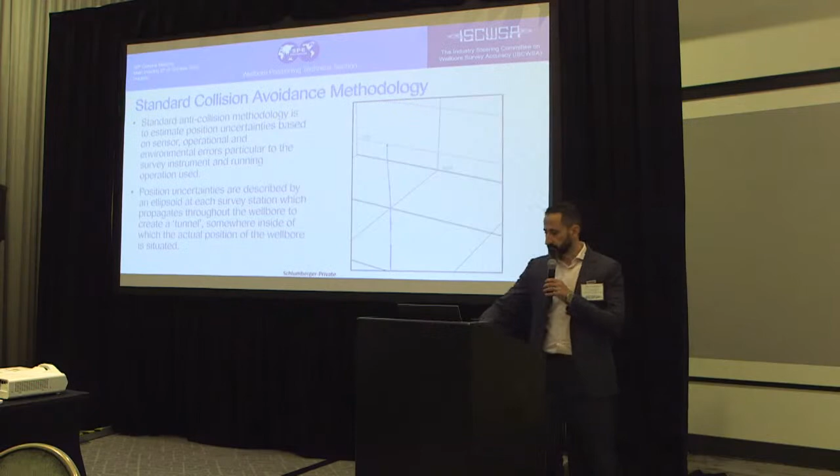So the standard way today to avoid collision, you guys are all experts in this. The way that we avoid collision today, we take the survey first, usually, and calculate the ellipse of uncertainty based on the tool that we run and the environment it runs in. We have the ellipse size, and we do the same for the offset well as well. So we have two ellipses.

Based on these two ellipses, we calculate the separation factor, which is the ratio between the center-to-center distance between the two wells divided by the combined uncertainty between the two wells. This is the conventional way, this is how everybody's doing it. It's very safe - typically there isn't a single collision occurring due to using this. So there's no issue with this one.

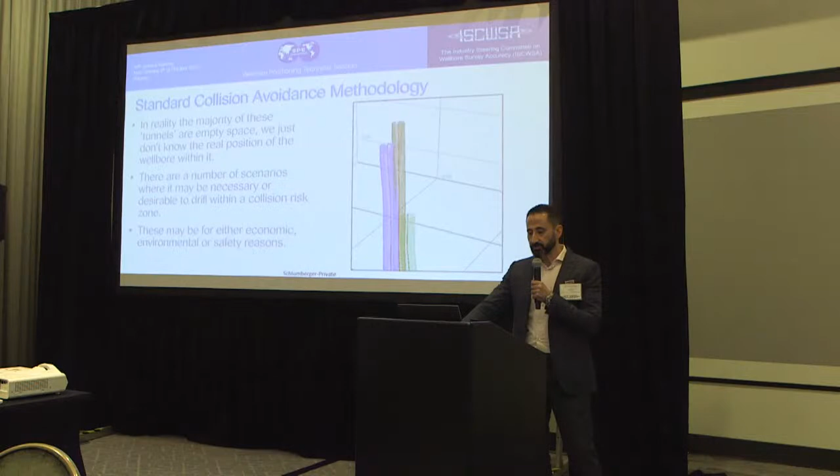So in reality, the size of the ellipse that we have, the well can be anywhere within it - it could be on the far left, the far right, or probably in the middle. So we have a lot of region, a lot of part of the reservoir that is untapped. So in some applications, we might need to go and drill in this region of high risk of collision.

Several reasons - one I just explained, like infill drilling. You have your ellipses touching, and now you say I'm not going to drill any closer because of the collision risk. But what about your reservoir production? What about all the other aspects? In some situations, you need to drill closer, and these are some of the examples, some of the applications.

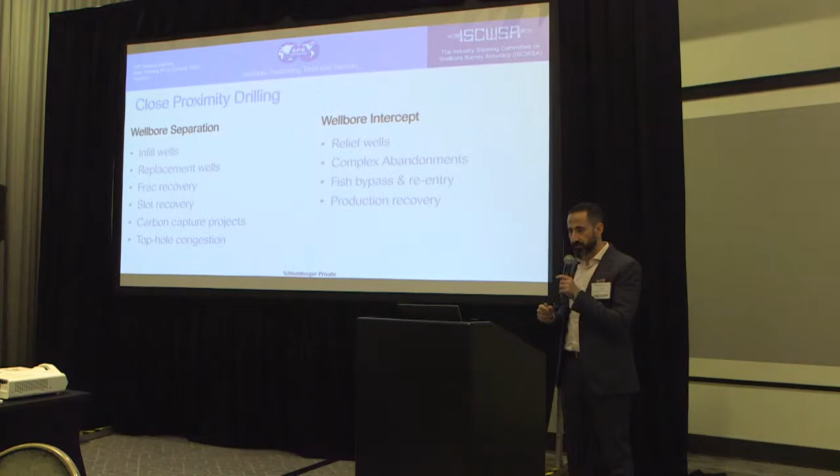Infill wells - you need to drill closer even though you have a collision risk, but you start to think of ways to get closer while monitoring the collision and avoiding colliding with the other well, even though we're using the separation factor. Replacement wells, frac recovery, slot recovery, carbon capture, top sections, top hole congestions. So these are situations where we want to avoid colliding.

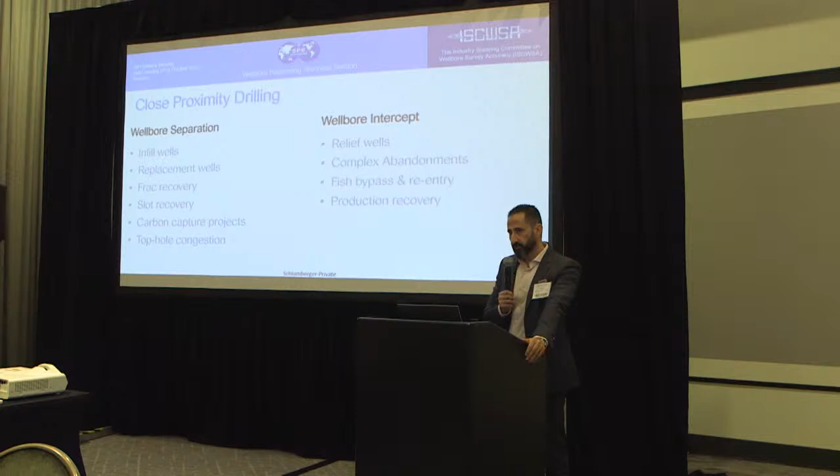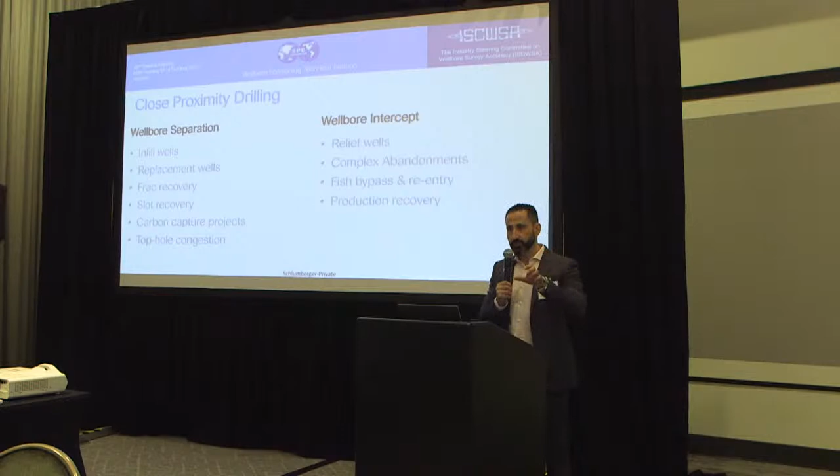Other applications as well, this will be on the other side when we want to intercept for relief well, for example, and like P&A and re-entry. We really want to intercept at a specific interval, at a specific formation, and we really want to avoid a premature interception. So this means we have to get close to the other well, and we have to enter this zone of high risk of collision, even though our objective is to intercept, but not here, later on.

So one way to do it is to monitor how far we are from the other well and range to it. How do we do it?

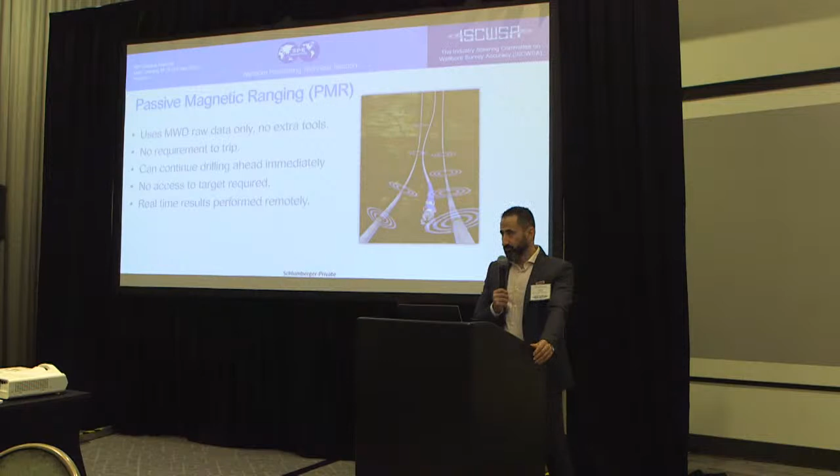Passive magnetic ranging, typically the most common and most economical method used. Vinny touched on it this morning, so I'm not going to spend a lot of time on it. But the takeaway is, it's done using any MWD tool, most MWD tools out there. You collect the measurement, process it, and it gives you - taking a certain number of surveys - an idea of the direction and distance of the offset well, given that it's cased, then you get interference from the cased hole. So passive magnetic ranging has been around for some time. It's nothing new - this is not what we're presenting today.

It falls into two categories, two aspects of passive magnetic ranging. One of them is monitoring, the other one is ranging. What I mean by this: there's one aspect where we take a survey per single, or a survey like by mid-stand, just to check for external interference, just as a detection to tell us if there is interference or not. It doesn't tell us anything more, just gives us an idea if there's interference.

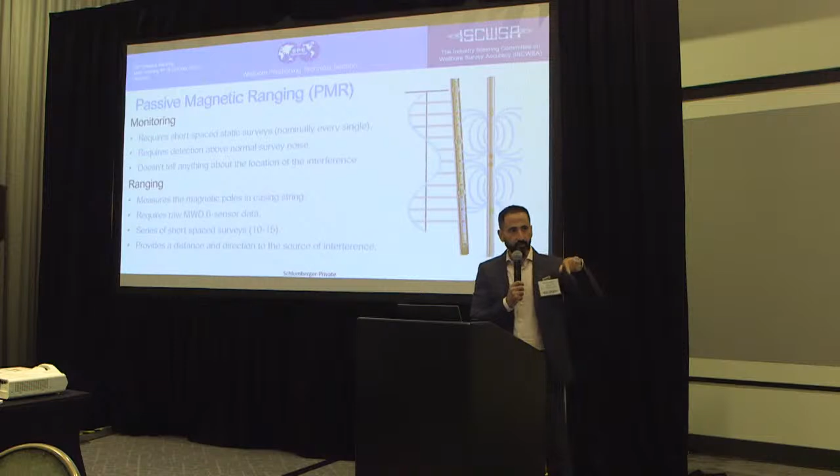This could also be done for some MWD tools that log continuous magnetometer data along the axial. We take this data as well and it gives us an indication. It measures the magnetic field, but like I said, it doesn't tell us where. It does not know the direction.

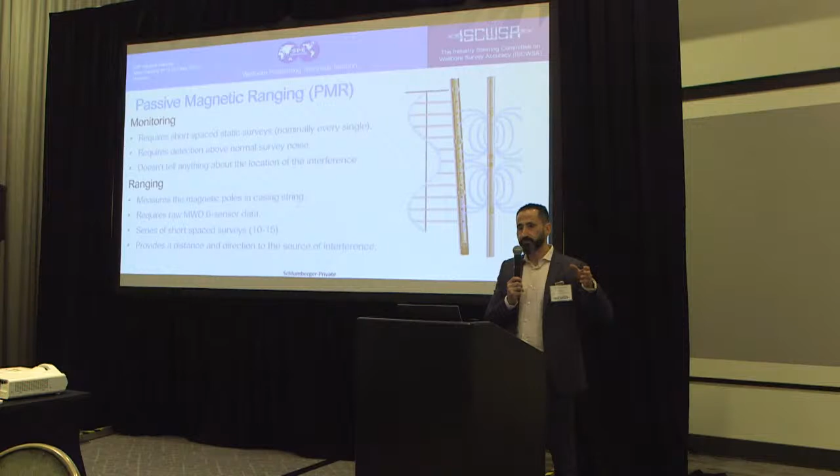When we want to do the ranging, we have to take stationary surveys, 10 to 15 stationary surveys. This is when we decide, okay, now we want to know the distance, we want to know the direction. So what we do is take somewhere from 10 to 15 stationary surveys. And this is how it's done today.

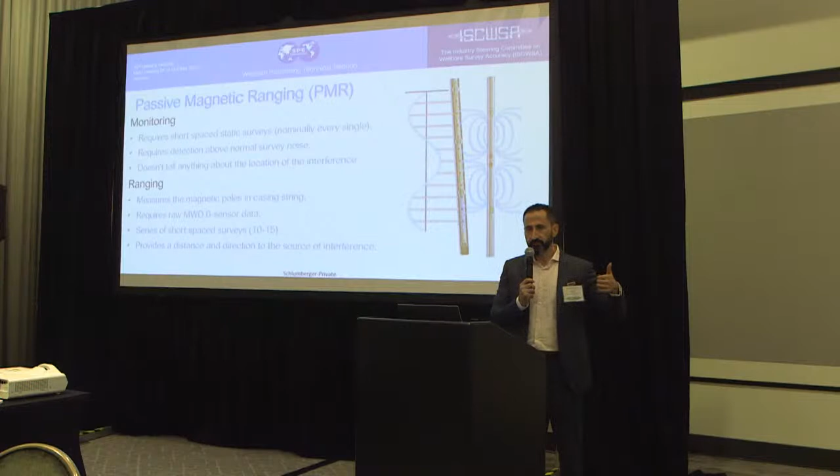What we're presenting to you today is how we are taking advantage of continuous 6-axis data while drilling. Why? Because to take these 10 to 15 surveys, you have to cycle the pump every time, so there is rig time involved. The borehole conditions can be impacted if you cycle the pump 15 times in a very short interval.

So in order to overcome this, we are utilizing our definitive dynamic surveys. For those of you who are not familiar with it, this is a next generation MWD tool. It takes surveys on the fly, every 20 seconds, and stores them in the tool. We get it pumped up pretty much every 2 minutes and we can get a survey.

And when I say we get definitive surveys, we get 6 sensor data with full QC parameters, the same ones we're used to with the field acceptance criteria. This is done on the fly - this is what gets pumped up, QC'd, a definitive survey that we can use.

In order to do this, there are a lot of challenges, because since the inception of the MWD tool, all of us know that we need to stop drilling to take the survey, especially directional surveys. This has all changed right now - we don't have to stop to take the surveys anymore. We run this tool and take surveys all the time on the fly.

We're able to handle this by having a high sensor sampling rate, processing speed, increasing memory, and improved environmental corrections to enable this process. Also, upgrades and changes in the hardware and firmware to handle shocks, vibration, and stick-slip while drilling allow us to come up with these accurate definitive surveys.

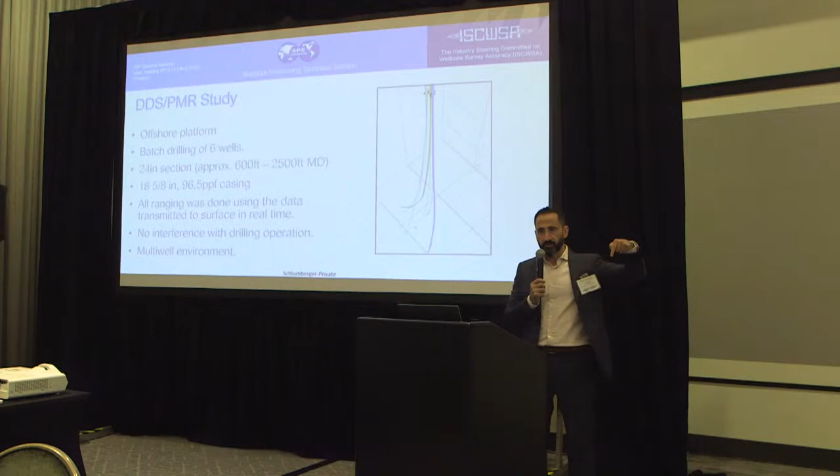platform where we're drilling in batch drilling, and we looked at the data from the top section. This is a 24-inch section. We're drilling 6 wells in batch drilling, so we skid the rig in 24-inch, drill the second well, well 2, then well 3, well 4, well 5.

So we know the position of the other well approximately. We know the surveys, and now we're going to do the ranging and compare it to the position that we think it is. We have another challenge - we have an environment with multiple wells to look at.

With this, I'm going to turn it over to Mark to walk us through the results of this interesting case. Thanks, Mahmoud.

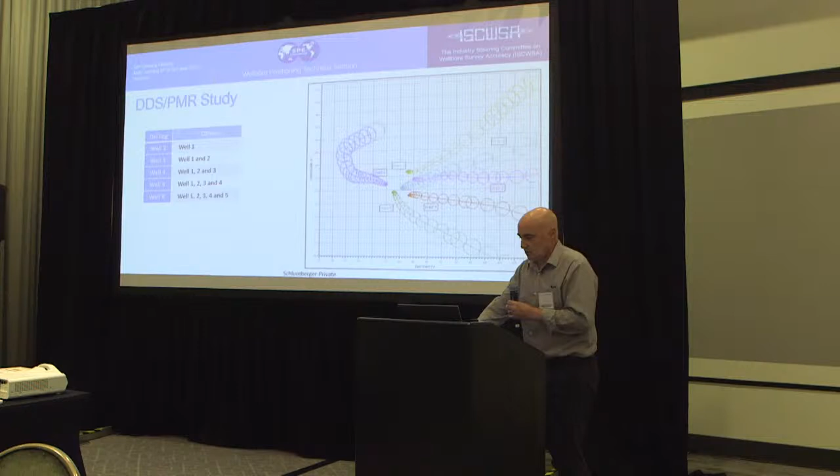This is a very good quality magnetic signal from an offset well casing string. We've got 18 5/8 inch, 96 pound per foot casing, so it's a big, strong signal. It's new casing, so we would expect to see something really strong.

We took four ranging results there. We're trying to compare them with the combined uncertainty of the two wells, so I had a bit of difficulty putting that all onto one well, so you've got to kind of expand the green ellipses a bit. The pink trapezoid shapes are the ranging results with uncertainty. We got really good correlation there with the ranging results, which you would hope to get with that type of signal.

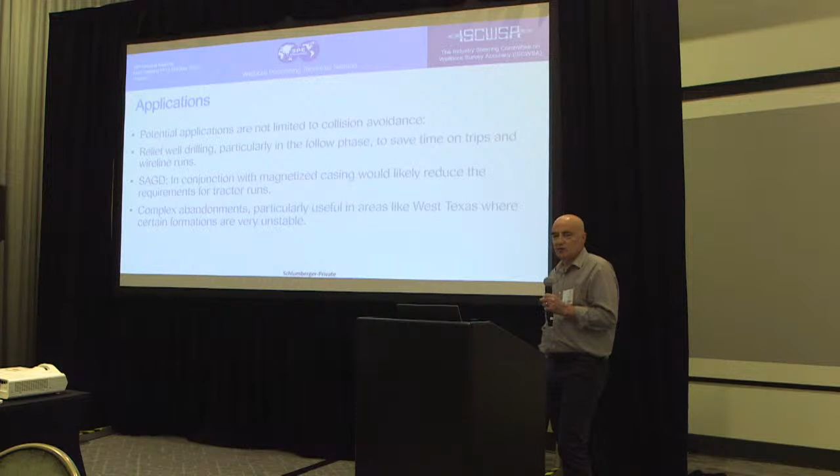For SAGD wells, running magnetized casing can often be beneficial, and using this method you won't need to stop to take ranging data. Similarly with relief well drilling, where we have complex abandonments and the formation is particularly unstable, there's no requirement to stop, and you can get ranging data throughout that formation.

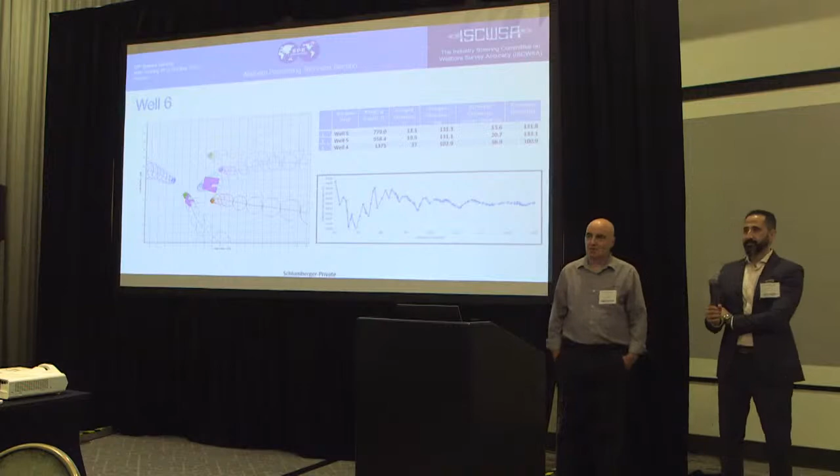Thanks, this is fun. I'm picking up on Clint's question. If you had a rotary steerable which had a 6-axis system, could you use that for passive ranging? But we don't. Where would you have it? It will come soon, maybe.

Todd, with the North Dakota Oil and Gas Division. Very good presentation. I've got a couple of quick questions. First, one of them got answered already, so I appreciate that. So what contractors are using this - these definitive dynamic surveys? Is it primarily Schlumberger right now, or are there other contractors? And where is this being used - is it used in the States, or in other countries? And if it's only used in other countries, when is it coming to this country?

It's a new technology developed by Schlumberger, and currently only Schlumberger provides it. It's not run in the US very often. Typically when the technology comes out, it goes to US land less, and more to deep water - Gulf of Mexico, Alaska, that's probably yes. So it's been run all over the globe right now, not specifically for this passive ranging application, but just to save rig time and to have more surveys on the first run.

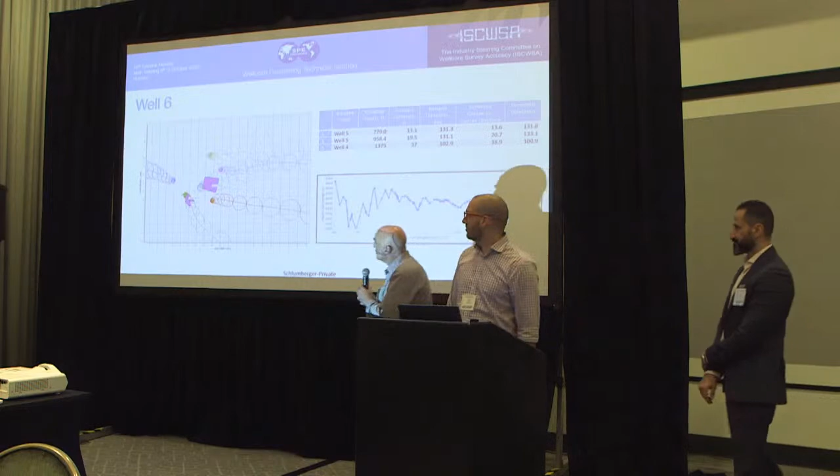And a second question with two aspects - I see that you're putting uncertainty shapes, let's say. First, there is one pole which has a strange shape with two extensions - how is that possible, and how do you compute these uncertainties? How do you compute the positional uncertainty as we see in the shape, the purple shape? It's based on a trapezoid, so it's based on the tool face error and the distance error. But one is not - there's two. Are you talking about the bottom? There's two of them on the left. There's two there, that's just the label covering it up. Yeah, it's just - oh, sorry, it's hard to get a 3D representation on that 2D image.

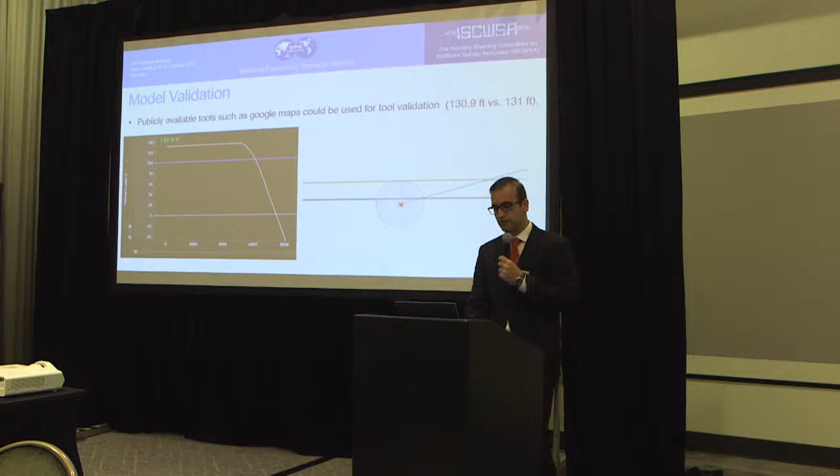But for validation, we also have other methods publicly available, very well-known, famous Google Maps - you can use that as well. Here we have a surface location, and you can just draw a circle around the surface location to this orange line, which is the boundary. That's something that we show on the tool. So if you do that circle, the radius of that circle is around 131 feet, and our tool also shows pretty much the same number.

So having these validations, it just gave us confidence to go ahead with the implementation and actually use it. And I'm going to show you some results now.

But before that, I'm going to use some terminology that you guys probably are familiar with, but for those of you who are not, these are some definitions that I'm going to use. And probably when I show you the results, you might ask me, what are these points? So I'm going to explain what they are.

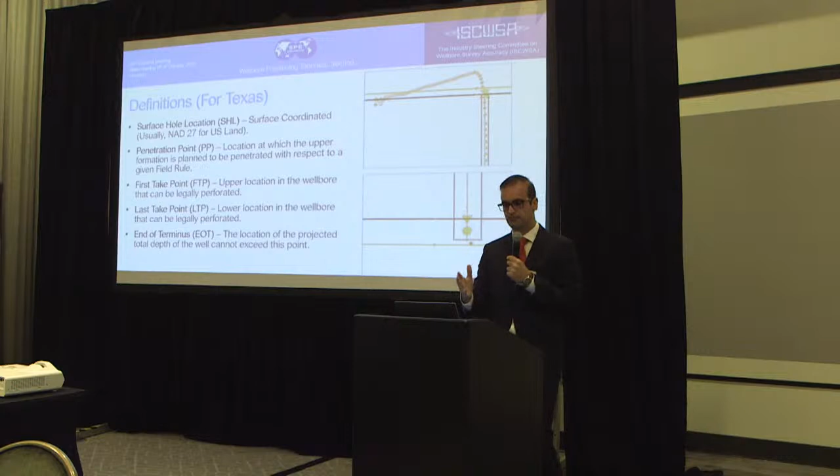So we have the surface hole location, SHL, and the penetration point, or PP, location at which the upper formation is planned to be penetrated with respect to a given rule. Then we have the first take point, the first point that you can legally perforate and get oil from, and last take point, same thing, last point that you could get oil from. And then we have the EOT, end of the terminus, and the total depth cannot exceed this point, which still should be inside the lease boundary. So these are some of the definitions that we use for Texas. For other states it might be slightly different, but that's a different story.

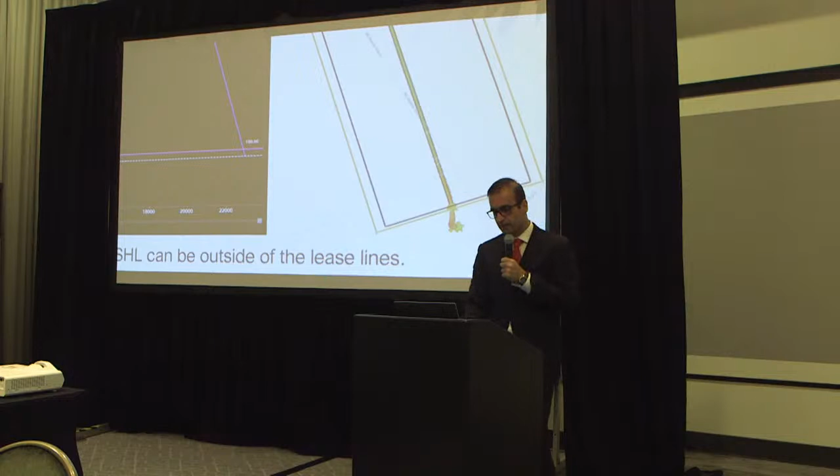Here's another example. I thought this one was interesting because when I was doing this work, it was pretty interesting to me. The surface location could be outside of the lease boundary, but again, the first take point should be inside the lease. That's why similarly here, you see that you are around 500 feet outside. When you start the well, you go all the way down, but after you build the curve and want to land the well, then you go inside the lease.

Just another example—the other thing is we show both planned and actual. As you can see here, we are at this point and we are following the plan pretty good, staying inside this 50 left and right.

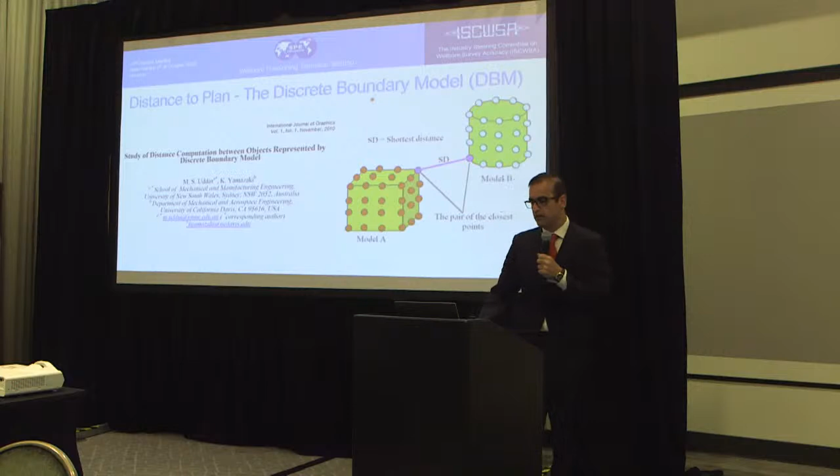So one other thing we wanted to show was distance to plan, because you have your plan, and ideally you don't want to get away from it too much. Sometimes you can't help it—it might be a few feet off—but ideally you don't want to get too far from the plan. To do that, we use a method called the discrete boundary model, which is a general model to calculate the shortest distance between any two objects. Not necessarily a well, but basically any two objects—it's a very general approach.

Just imagine you have two objects. The way you do it, you put meshes on both objects, and you calculate the distance from one mesh to all the other meshes, and you do that for all the meshes. You pick the shortest pair, or the pair that gives you the shortest distance, and that's the nearest distance between two objects. That's the method we use to determine the distance to the plan. We initially developed this for the safe separation tool, as Jonathan said, but the same method could be applied here.

The only difference is that you have the reference well and your offset well. This time is your actual well, and let's say this is your survey station. Then you divide it into different nodes or meshes, and calculate the distance from this location to all these other nodes, picking the smallest one as the nearest distance to the plan. It's similar to the growing sphere method that people are familiar with.

But we also do calculations for the distance to the plan, because sometimes lease information might not be readily available, or there might be other issues with data quality. But even having distance to plan, if your plan is correct, it gives you an additional check to make sure you're not getting too far from the plan.

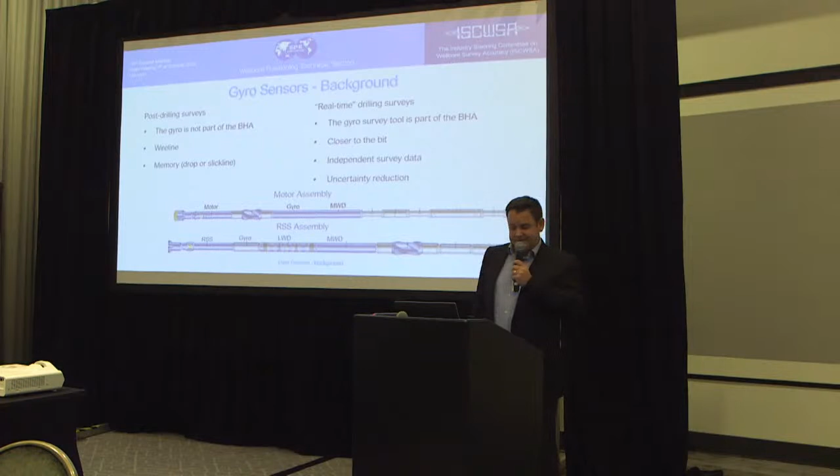Typically, when we run these tools, we run them with the MWD as the host. So the MWD would send us pumps off commands to initiate a survey cycle. We would then send the survey data back to the MWD tool, and it would transmit it to surface.

When the first gyro while drilling tools were developed in the early 2000s, at the start of the millennium, they were all based on spinning mass gyros. The example here we have is a dry tuned gyroscope. The bottom half of the sensor has a spin motor and bearing assembly. The spin motor spins at many thousands of RPMs typically, and the bearing assembly will support the rotor. It needs to be well maintained and lubricated so that the tool can operate from its range of very low temperatures near freezing to in excess of 100 degrees C.

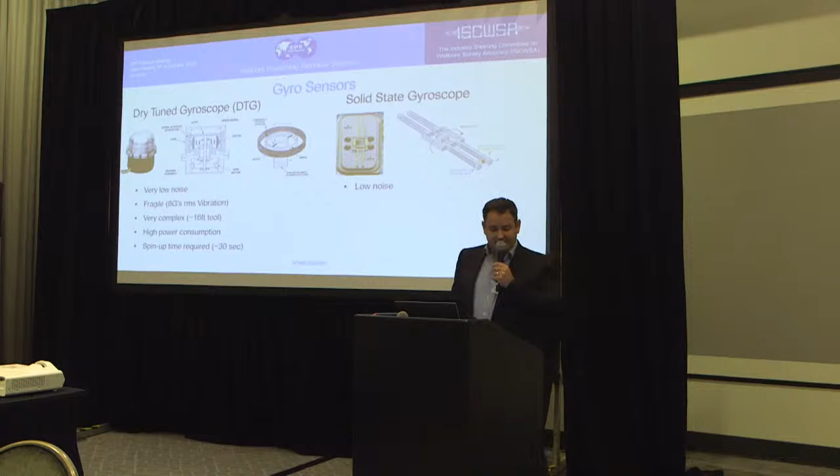And we can measure this in order to establish azimuth. So when we compare it to the dry tuned gyroscope, the solid state gyroscope has low noise, slightly higher than the dry tuned gyroscope, but this isn't really significant in terms of the IPM or error model, because environmental noise is the dominant term there.

It's more robust with the equivalent rating as an MWD tool at 20 Gs RMS. The tool's simpler and shorter, 3 feet long, which means it can fit in a much shorter collar. It's also got very low power consumption, around 2 to 3 watts. There's no spin-up time required, so it can operate within 1 second of starting up.

In terms of remote operations, the fact that the tool is robust, short, and has very low power consumption lends itself to in-collar loadouts.

In order to evaluate if remote monitoring is feasible and plausible, we need to look at the tool verification process. This is probably similar to most other measurement instruments that are run downhole, where we have a cycle where we start with a job call-out, planning and preparation phase, where we gather information required to mobilize the tools and assign appropriate tools and people.

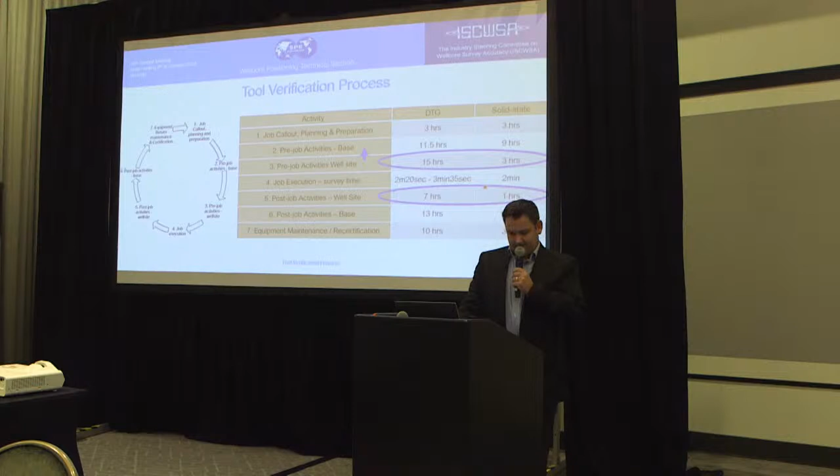As mentioned previously, the characteristics of the solid state gyro lend themselves to in-collar loadouts. That can create further efficiencies where we can push some of the activities completed at the well site to base, either pre-job or post-job.

This leads us to the process of implementing remote operations. So with the dry tuned gyroscope, we have 2 service specialists at the well site. The tools are loaded in the collar at the well site, and the pre-job well site checks are completed by the service specialist. The job execution phase is also completed by the service specialist at the well site, and he'll decode and QC surveys as required.

The first phase of heading towards remote operations is to remove one of the service specialists at the well site. The tools are still loaded in the collar, and the pre-job well site checks are also completed by the service specialist. The job execution phase is completed by a combination of the service specialist at the well site and the remote monitoring center. What this phase does is basically confirm that we can carry out the job execution phase remotely.

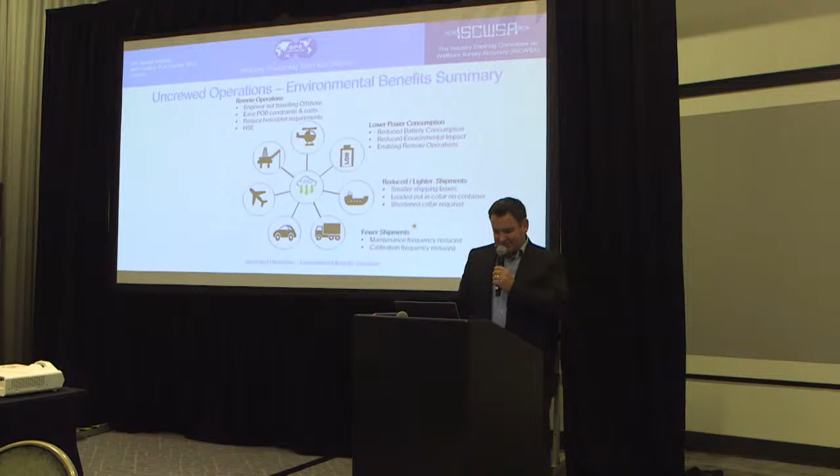We also have fewer shipments where maintenance frequency is reduced and calibration frequency is reduced. Less engineer travel, domestic and international flights. And then finally, for the rig impact, we've got fewer crane operations, a reduced footprint on the rig with no container, and reduced PHA handling.

So to conclude, the solid state technology contains a number of benefits over spinning mass to enable remote monitoring, lower power consumption, increased shock tolerance, no shift in calibration, and no requirement for real-time or post-run corrections. We've got simplified testing in QC, and high levels of automation are also achievable, allowing tools to be run by third party with minimum training requirements.

Okay, thank you. Any questions? Okay, thank you so much.

Hi, I'm Lisa. Lisa, wow, bad influence here. But thank you so much, I think this is really great. I think that I can see that the human factor can really be taken out of some of that.

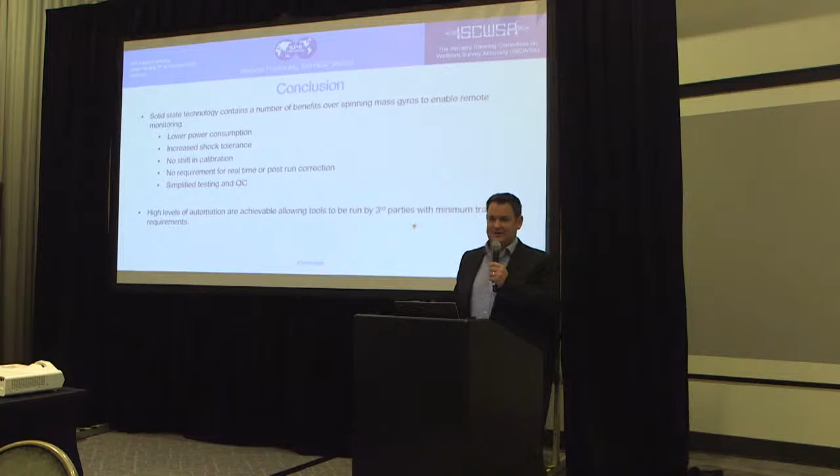Yeah, so any suggestions? Yeah, we do have it, and there is an operator in Norway who also has a similar methodology where the MWD model is significantly larger, and when it's verified by a gyro, the ellipses are shrunk considerably now. But yeah, there are a number of different ways to implement that, but for sure, if you're combining different surveys, the management of IPMs and databases is a consideration. I'd like it to be entered all as one run and be described as a mix and know which stations came from which.

Thank you for that, Robert Estes, Halliburton. What's the maximum operating temperature for your solid state gyros? You're looking at around 140 degrees. We're limited basically by calibration range. So as high as we can calibrate it, we can operate. So 140 to 145 degrees C. We have ovens that go higher than that, which can help you out. But the device itself, in the future, what do you see as the ultimate limitation of the maximum operating temperature?

Oh, you're going to take it. Yeah, so the sensing element can go higher, but we need to work on qualifying all the electronics, the memory and all that to get something that we have not done. But yeah, the sensor can go higher than that. You see this as a potential geothermal navigation tool? Possibly, but so far the market for that hasn't been that much, so we are focusing on the main market. Thank you.

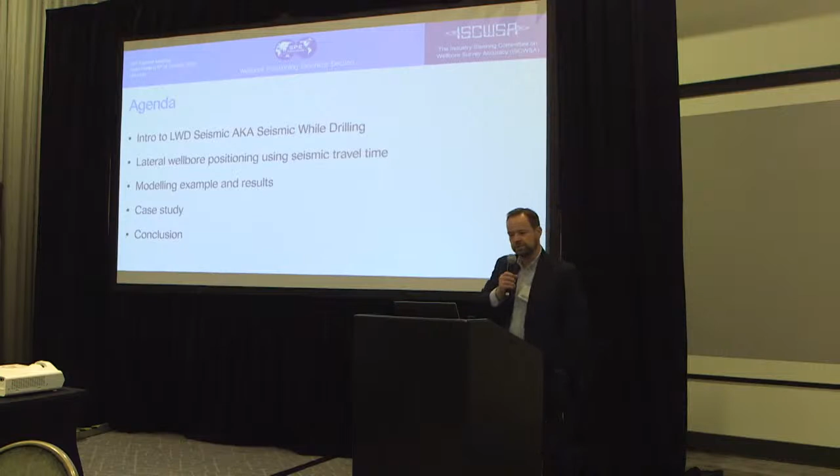I'll do a very quick intro to LWD seismic, otherwise known as seismic while drilling. We'll look at lateral wellbore positioning, a possible use using seismic travel time. We've got some model examples, results, and a case study. The tool itself is just an LWD tool, relatively short at 14 feet, and can be used in any hole size above 8.38 at any hole angle.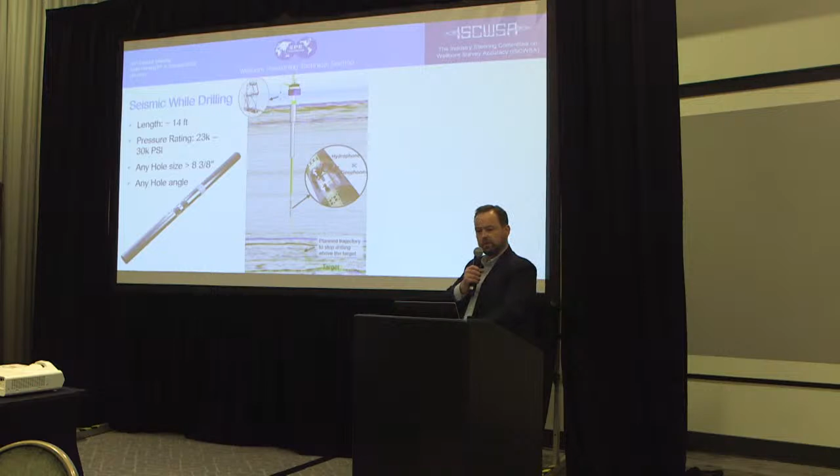Inside, it's got geophones and hydrophones - the geophones are sensitive to physical motion, and the hydrophones are sensitive to pressure. Then we've got air guns, which are deployed from the rig, and when we make a connection, that's a good time to acquire seismic.

So this is a little video of what's going on. Basically, we've got this tool down there, and it's trying to listen for these guns going off several kilometers or miles away, so it needs to be a very quiet, acoustically quiet environment. While we're making a drilling connection with the pipes and slips, we're not pumping, we're not rotating - everything's stationary and quiet down there, so that's a good time to listen.

While the connection is being made, we fire the guns several times to stack the data and increase the signal to noise ratio. The time it takes to fire off several shots at 15-second intervals is normally plenty within the connection time. So in that case, it doesn't take any rig time to do the acquisition.

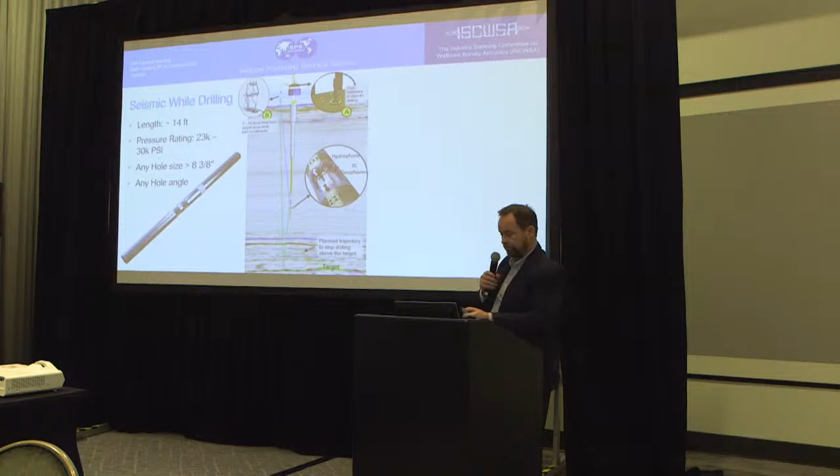So then we get our measurement where the energy travels down to the tool. The blue lines show travel time - we're basically measuring the time it takes energy to get from there to there. And then also we can get some reflection data for look ahead, if we want that.

That data is then assembled in the tool as stack data. And then as we drill via MWD, this comes back to the surface here, and we can use that for look ahead to geostop above a reservoir and that kind of thing. But that's just what we classically use it for.

So now we'll get on to more interesting things. Also, we can deploy it from a vessel. Here's a little video of a vessel with some guns over the side popping away. Typically, we're maintaining a position directly above the wellbore here.

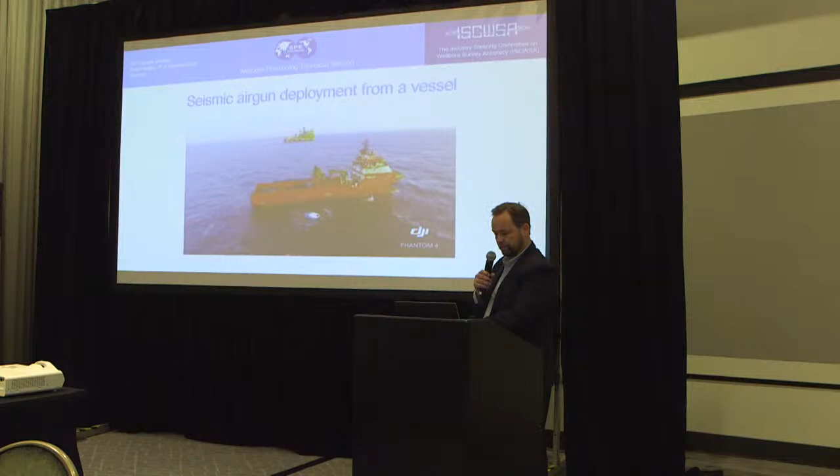On that vessel, we need to know exactly where this gun is at the time we fire. So we have some surveyors on the boat with GPS positioning equipment. It's pretty accurate - we've got differential GPS on, giving sub-meter accuracy of the shot point locations.

So in the same way that we use GPS to figure out where we are on Earth, by using the travel time from several satellites to triangulate our position, then why not try to do the same in the subsurface using seismic waves? Similar principle.

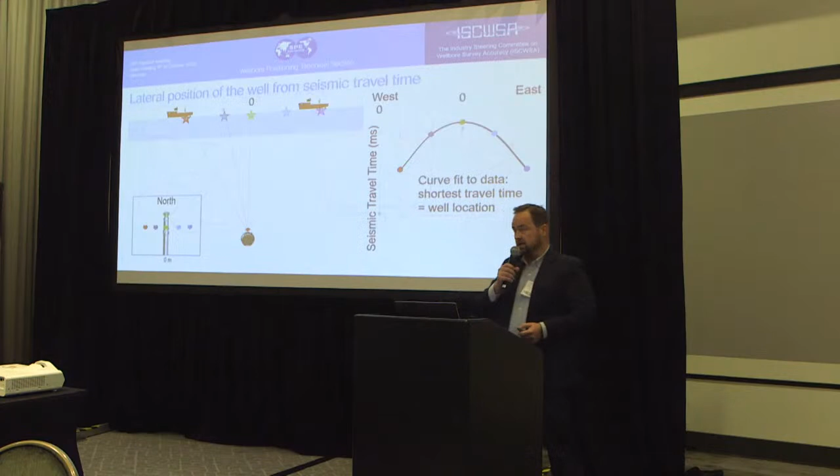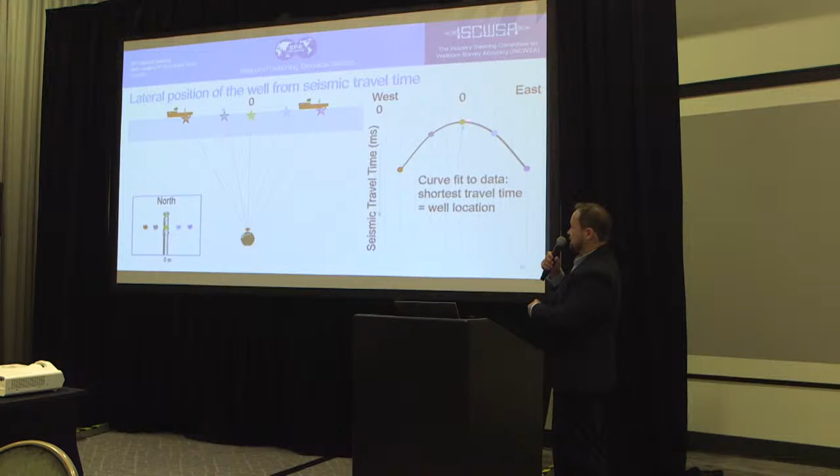In essence, the proposed technique is quite simple - we'll look at it in more detail in a minute. Basically, if you measure the travel time from several different locations at surface directly above this - this is a bit coming towards us - and plot those travel times, this is increasing travel time going down. Then the shortest travel time is where we would expect to be closest to the well.

So the thinking is, sometimes especially with ERD, we see the EOU get quite wide. Could this be useful to basically collapse this EOU down, and then we go back to normal surveying, and then maybe do it again, do it again, do it again.

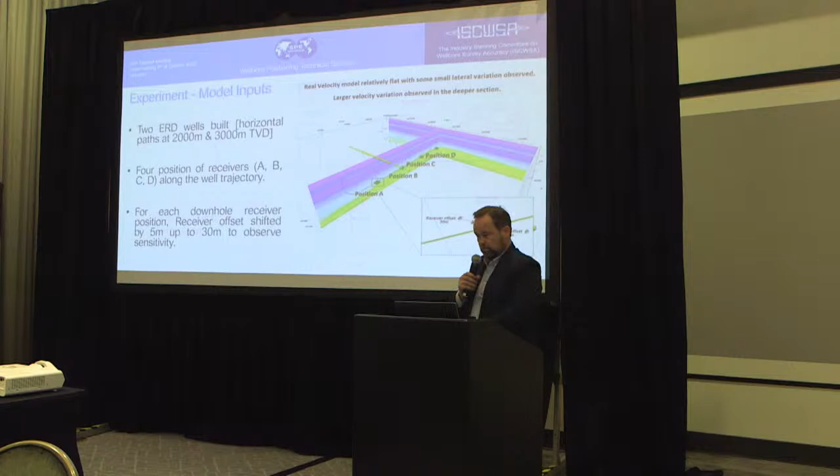So my colleague, who can't be here today, Ludovine Urani, she's a geophysicist, and she did some modeling here. What we've got is a velocity model from the 3D seismic - and the 3D seismic is basically where we decide to position the well in the first place. For several points along the well trajectory, we've got positions A, B, C, and D.

We've got two well trajectories here, one at 2,000 meters TVD and one at 3,000 meters TVD. We can put our air guns, if you like, at all these yellow points, and we can model what the travel times are, make this curve, and see what the result is versus what the reality is. So we can basically test the sensitivity of this method using real data.

So this is the 3,000 meter well. It's going into the screen that way. These are the different points along the well. We've got lots of different offsets above, different spacing.

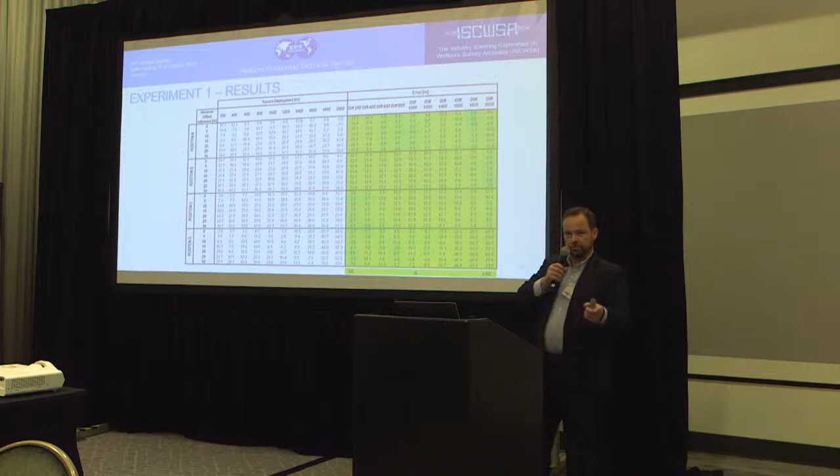And then when we model those times, we draw this curve, and then we figure out where the top of the curve is versus where the well actually is, and what's the error. All these numbers here - you can't see the color coding very well, but there's some green and some amber - show the sensitivity using different spacing between the shots.

So if we just take 7 points and space them, say, 200 meters apart, or 400, or 600, etc. along here, for each of the positions this is the resulting error. There's a range from 0 down to about 73 meters, but the majority is within less than 10 meters where we have the green here. I think all the green is within 5 meters.

Then we do the same thing for the other well at a different depth. This is basically to explore, if you're going to do this survey, what's the optimum spacing to do the acquisition.

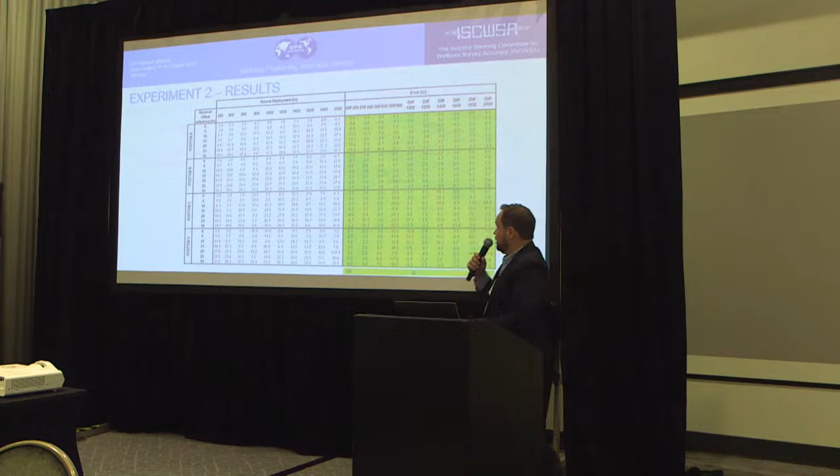This one's a lot more green with the shallower well. And again, all the green is within basically 0 to 3 or 4 meters. There's a few outliers, but from this it's not highly sensitive in this case, and you should expect to get good results.

So this line we're doing is at 90 degrees to the direction of the well. A different azimuth could have an impact, so again it's just another test to see if there's an optimum azimuth in this case.

Here we've got a result of about 2-3 meters error.

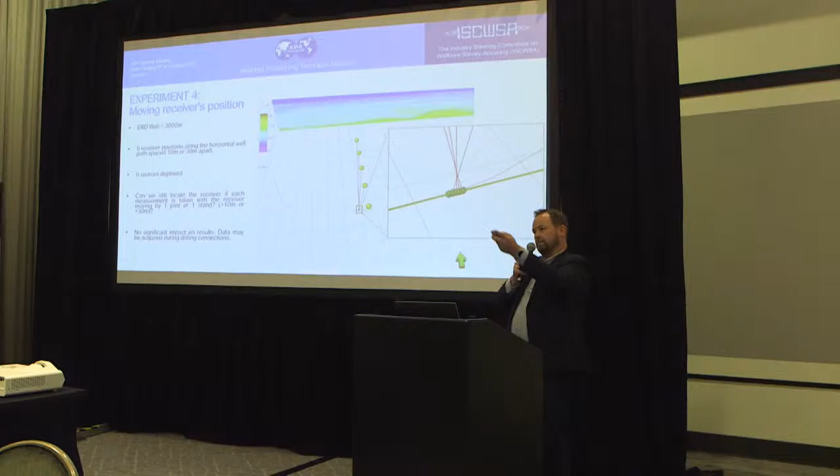The last thing is to do this practically, and ideally we want to do everything without using any rig time. So imagine having a receiver in one position downhole, and moving a vessel, shooting here, moving over there multiple times, maybe moving a couple of kilometers.

That would take time. So what if we do our first point at this MD with our boat over here, and then shoot it, and as we're drilling we send up the data, and the boat moves to the next point. At the next connection, we shoot again. So the receiver isn't in exactly the same position, but it's moving along a line, and if you work out the angles, it's not sensitive in that direction. So the results come out very, very similar as if you just had a stationary receiver.

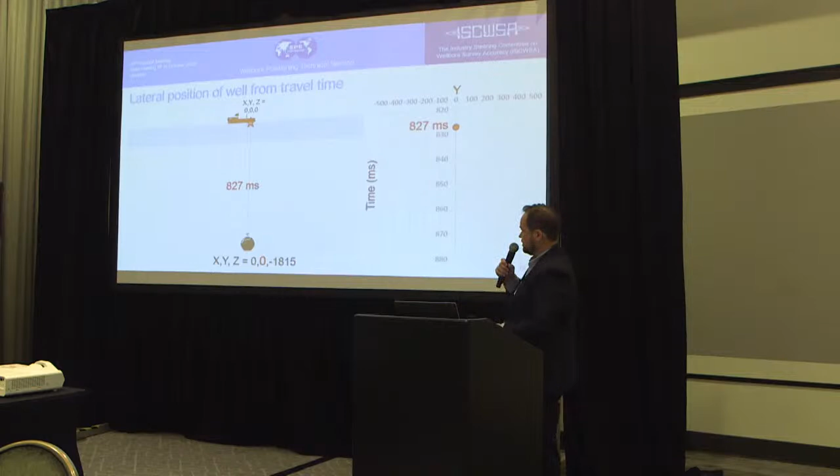If you look at this in more detail, here we have our vessel with a position XYZ, and our downhole well, with the bit coming out towards us. The actual position is XYZ is 0, 0, -1815, and the travel time is 827 milliseconds. We plot that here: 0, 827.

Then we move the vessel 200 meters off to the side, record 831 milliseconds, plot that, 846, plot that, and do the same on the other side as well. Then we fit a curve to these 5 points, and we get an answer of 3.4 meters when in reality it's actually 0, but 3.4 isn't bad. There's probably maybe 5 meters plus or minus uncertainty on that.

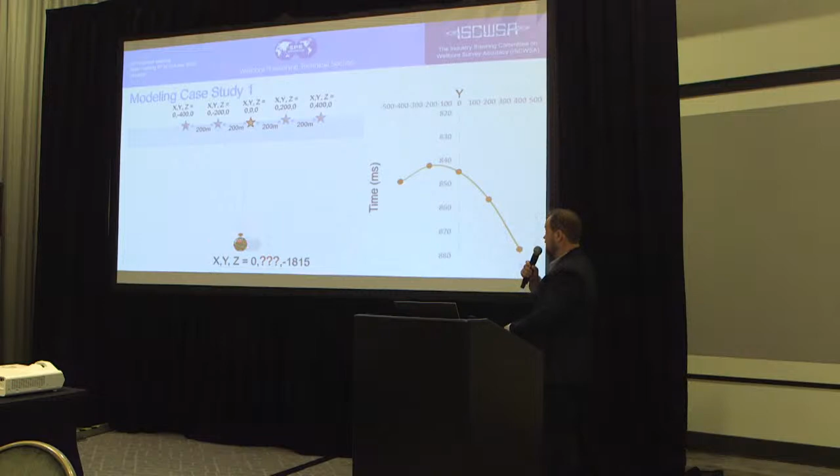What if we do this same experiment again, but actually the well is now somewhere else. We think it's in the middle, but if we move the well over here and do the same thing again, now we get this curve, and we look at where the top of the curve is. The well has actually moved 150 meters off to the side here, and the survey result is 158, so we have an 8-meter error in that case. Again, if we move it the other way, we get a 2-meter error for this model.

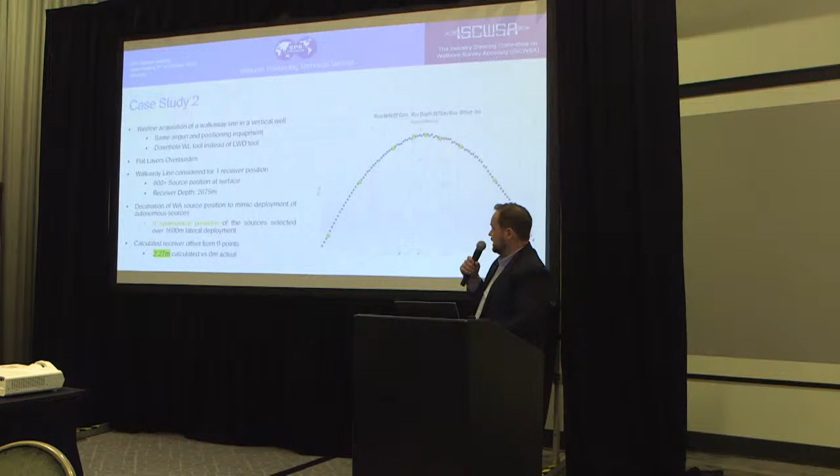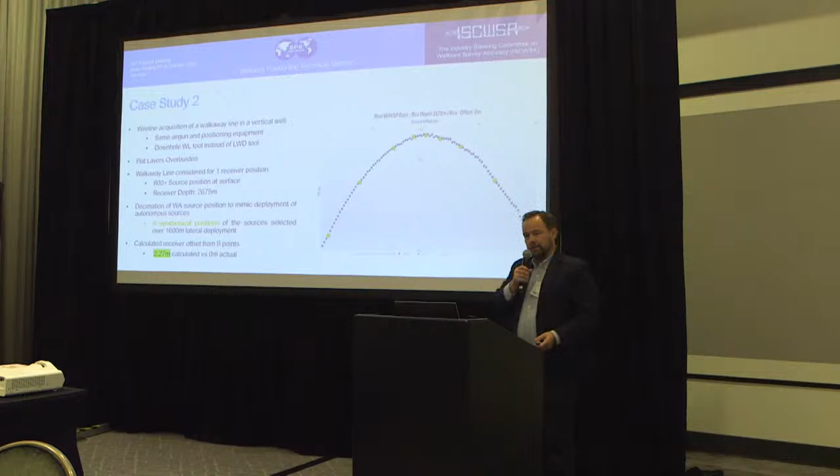So the next case study is taking some real data from a well. This was actually acquired through wireline for a walk-away survey for anisotropy or something like that, but the data set's valid. We have a downhole position in the well, and a boat sailing across the top shooting. It shot loads and loads of shots, all of these, but we'll just pick out several points, like 5 or 7 points as shown before, and calculate where we believe the well is based off the curve. The error is 2.27 meters away from where the well actually is in the Y direction, assuming you're going north.

So it's quite simple in theory, and I've got a little video here which I think is playing. Yeah, and this tries to illustrate how this might happen in a more practical way. We've got a drill ship, a vessel, and down here somewhere we should have our BHA.

In there we've got the seismic LWD tool, and in there you've got the geophone and the hydrophone. For the geophone, when we set off the air guns, that puts a pressure wave into the earth, basically shakes the earth, that's why it's called seismic. That shakes the wellbore, shakes the tool, shakes the sensor, and we record the response. Also the energy comes through, shakes the wellbore, goes into the mud, causes a pressure wave which the hydrophone picks up. So we're drilling horizontally here, our ellipsoids drawn laterally.

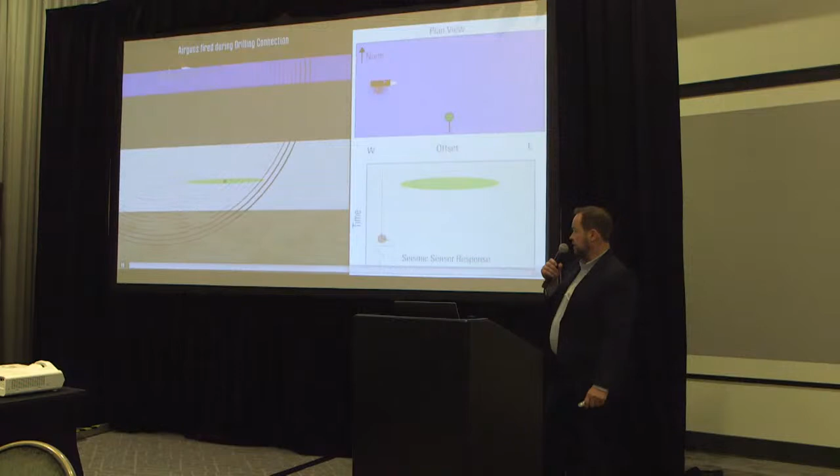Then if we want to take a point, we bring out the boat. As we're making the drilling connection and go into slips, everything is now stationary and quiet downhole. Even with rig heave, actually on the horizontals, the pipe doesn't move at all because of the drag, so it's excellent low noise conditions. While that connection's happening, we fire the shots and record that position. So we're looking at it in west versus east for a well drilling north, and we've got the recorded time here.

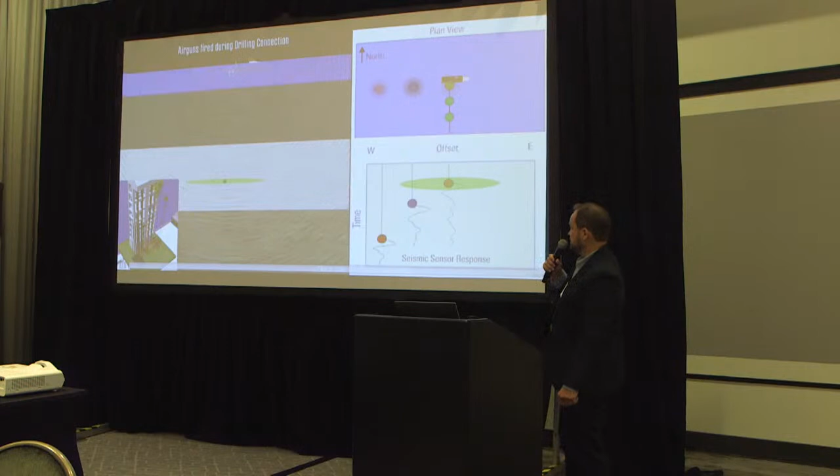We drill ahead to the next connection, shoot again, then drill down the next stand, move the boat, and so on. So we're getting like 5 different offset points, 200 meters or more. A boat can move as far as you like in the time it takes to drill a stand. After drilling, say a 30-meter stand, we've drilled 120 meters, and now we can reduce this uncertainty.

So I've got like 10 to 20 meters. That's playing it safe, I would say. Then, as we've done a survey, we reduce the error a bit, and then we go out to drill. That's the theory, anyway.

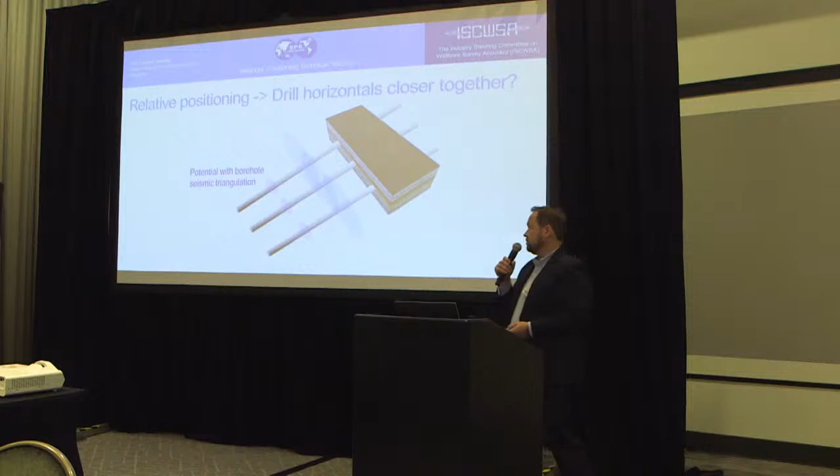So why would you do this? Obviously, what I showed you there is for absolute positioning with an XYZ. But also, if you did this in one well, and then did the same survey from the same points in another well, then you've got the relative position. If you've got a very complex overburden, that could cause some complication. But even with a somewhat complex overburden, any errors in the absolute position in one well will be the same for the next well, assuming it's not too far away. So the relative positioning could be quite good, and that would help if you want to put lots of wells close together.

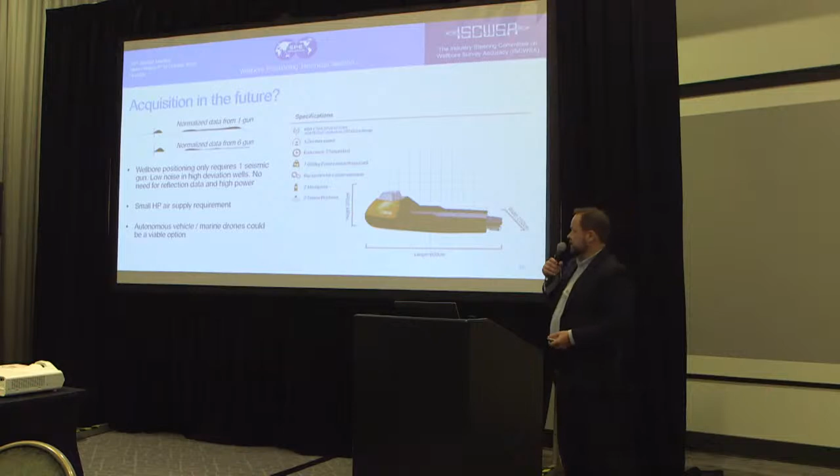So one of the most obvious questions is: you've got these big boats, and big boats are expensive. To have them hanging around all the time you're drilling, there's a trade-off of cost versus benefit. Right now, I just searched the internet and saw this company, don't know much about it, but there are lots of marine drones out there now.

The type of gun equipment we use for borehole seismic is usually for VSP surveys, where we're trying to get reflections from below for look-ahead, which requires a lot of energy. But for the positioning, we just need the first energy. So here, this is a waveform - this is where we're recording silence, and the energy arrives. You get a little wiggle, like what you see on the needle for earthquakes, when the earthquake first arrives.

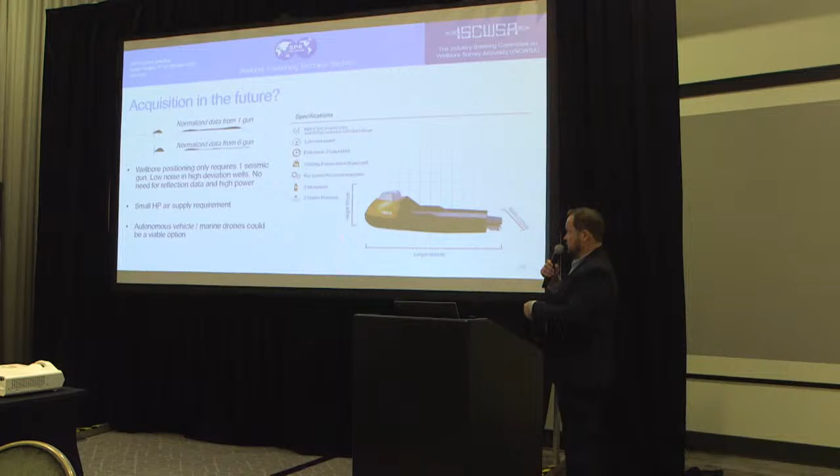So we've got our energy here - this is from a gun array with 6 guns, which needs a lot of equipment. And this is from the same thing with just 1 gun active. Because the noise is so low, once we start getting high deviation, we can just use 1 gun. You could easily deploy 1 gun on an autonomous machine like this - you don't need a massive vessel, it's simply overkill.

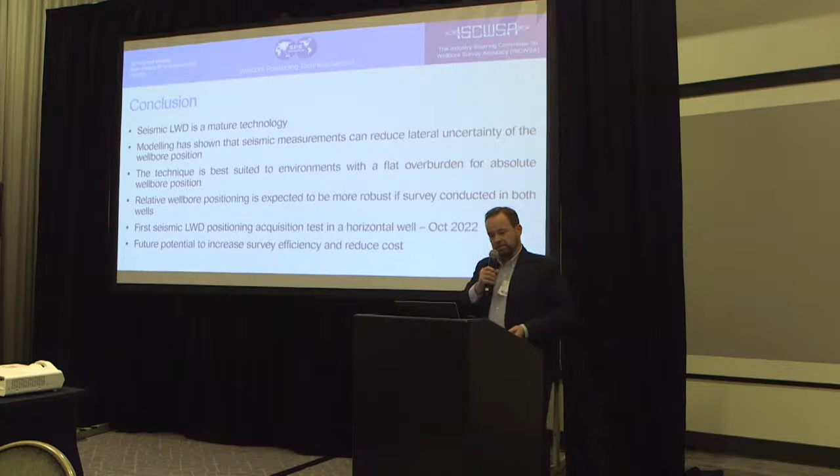So to conclude: it's seismic LWD. We use it mainly for depth uncertainty rather than positioning uncertainty, and it's pretty mature - I've been playing with it for 20 years now. The modeling shows we can reduce this lateral uncertainty. It's best used where there's relatively flat overburden for absolute position, but if it's a bit more complex, maybe just the relative position might be more appropriate.

So yeah, with the relative position, that should be quite robust, as any errors in the position are going to be similar for both wells.

The first test of this was a horizontal well in October 2022. In fact, I've just got the data on my laptop now - unfortunately I haven't been able to process it. It looks good, but we haven't come out with the results yet. It was a little bit too late for that. But that was with a survey we did with Equinor in Norway - we were just doing a normal VSP walk-above in a horizontal well, and while doing it, we thought, okay, let's give this a shot and see how it looks.

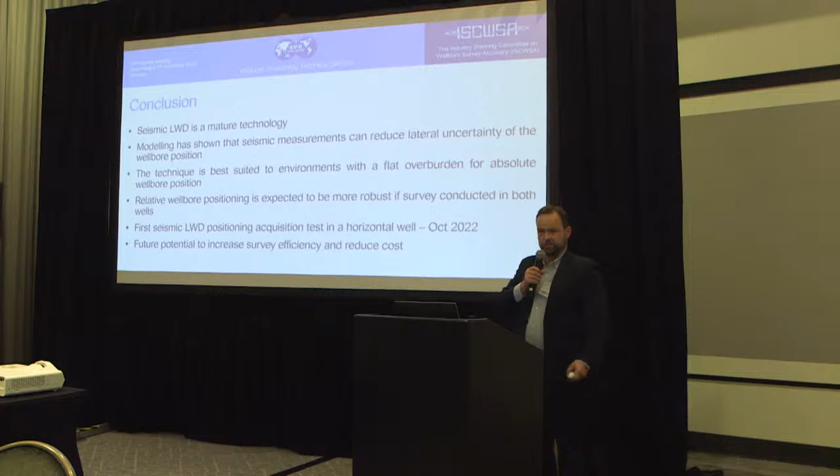So maybe in the future there's potential to increase efficiency and reduce costs if we can deploy those guns efficiently, or if you have a vessel that's hanging around anyway. That's it. Any questions?

Hi, John McMahon. So was all of it done perpendicular to the wellbore? Was the depth uncertainty ever explored? Is that the only reason you can't try to do both - that you're trying to do it while they're still drilling, so it's obviously moving forward?

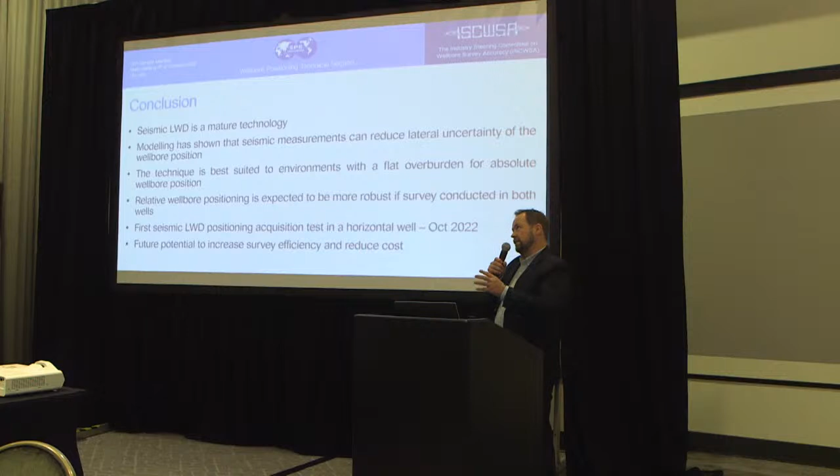Yeah, you could do all around and get that position. The way that we validate the measurement is at a point where the position uncertainty of the well is small, through the surveying. Then at that point we would do the survey with the vessel and hopefully get the same answer. And then that's good, and there's no massive changes in the overburden for the rest of the well. You could go 20 miles and do it again and have the same confidence in the accuracy. So you could, but I don't think it will really help with the error ellipse much, because it's where it's wide that we can help the most. That's why it's focused on that.

Hey, Mike with Base Center. Just to ask about the uncertainty values you quoted. The plus or minus 5 meters, is that including the movement of the source, or is that just the uncertainty in the data?

So that's the limit, assuming we have a source position that we know is within 1 meter at the surface. Then the next uncertainty is in the travel time and how well we can measure that. If we have, say, 1 millisecond error, and you've got a formation that's 3,000 meters per second, that's a 3 meter error. So it depends — in salt, you would have a higher error than in a slower formation.

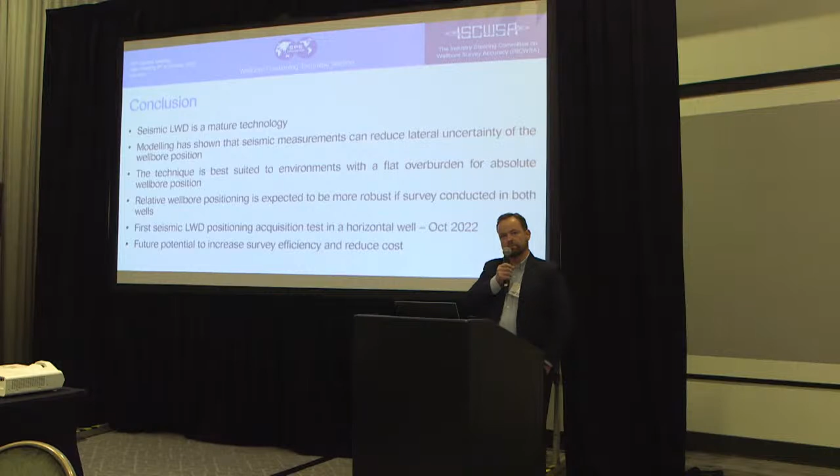Has it been used in land seismic or just offshore? Primarily this service has been used offshore. There have been some land wells. There's no reason you couldn't use it on land.

There are land seismic sources that could be deployed. I think within the industry, the smallest seismic LWD tool is a 6 3/4 inch collar, so a lot of land wells are 6-inch hole. Up in Canada, like the thermal wells, they're often 222 millimeter laterals where the tool can be deployed. And they're quite shallow too, so you probably have pretty good signal there.

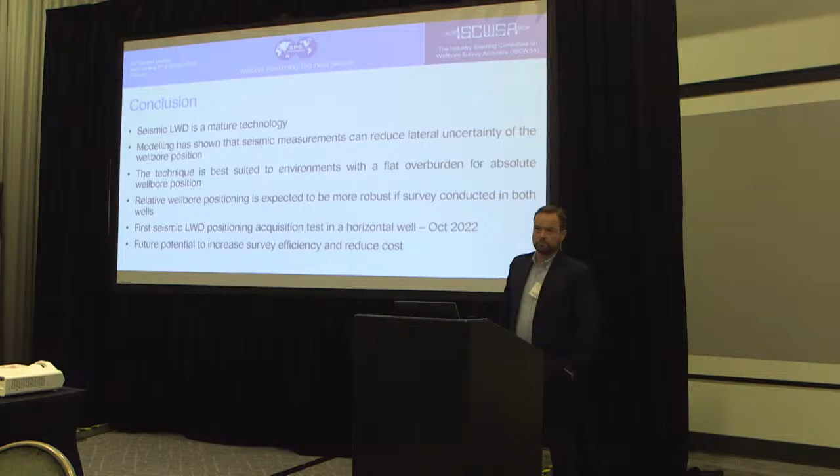Well, I guess it could help. We've had operators come to us with a well that's got a target this big, but his ellipse is that big. So in that respect, if the driller's target is smaller, then yeah, you could use it to guide it, of course.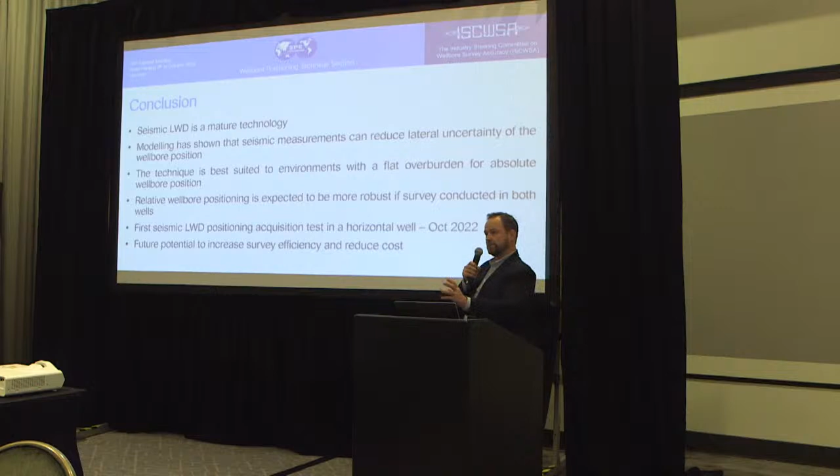Yeah, so the perception for seismic is massive. When I was working with offshore marine seismic, we had these 20 gigabyte tapes, which were massive 20 years ago, and we'd have a crate stacked with them. So we'd have a lot of data. Now the surveys are in petabytes and what have you. But for this little seismic waveform that we're sending up, it's one little wiggle.

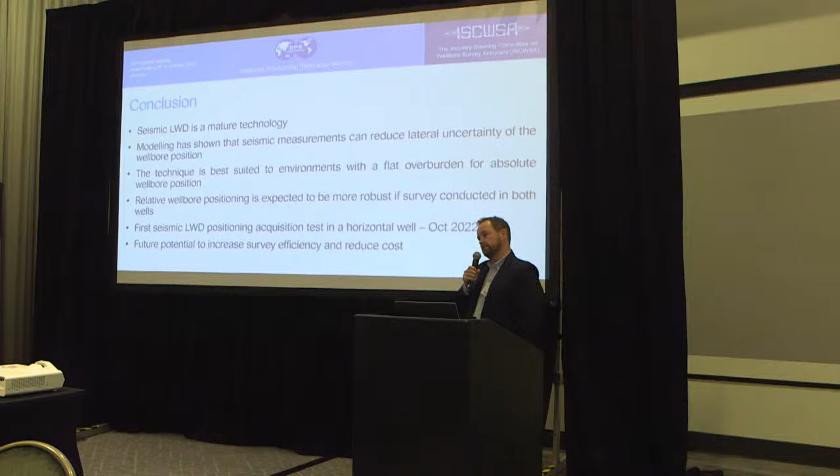If we compress it, it's about 10 kilobytes. But for the actual MWD mud pulse, it's really not a problem. We'd use maybe, for a typical well, between 10 and 20% of the MWD bandwidth for the seismic. And that's with mud pulse, not drill pipe or anything else.

Okay. Thanks for not falling asleep.

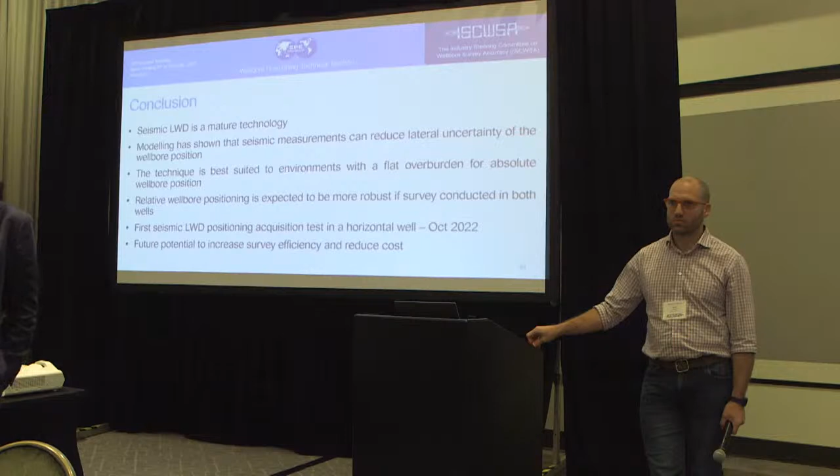Robert? Robert Estes with Halliburton. I've got a question I can throw out to Benny, if he didn't have enough questions. Okay, question for me, okay.

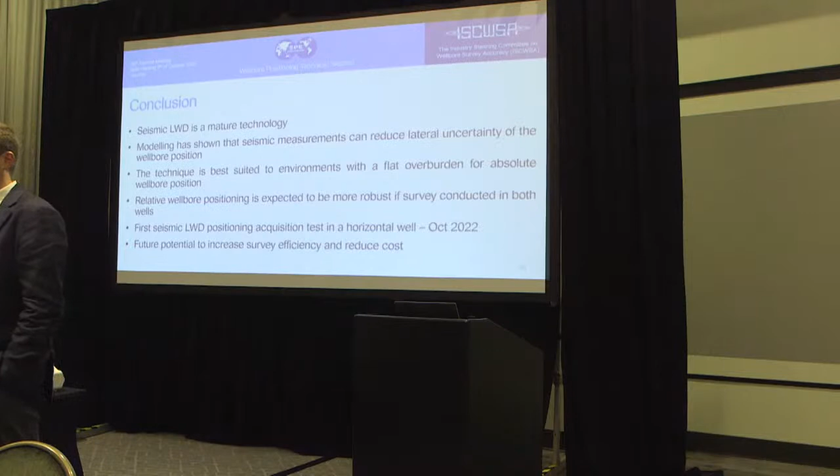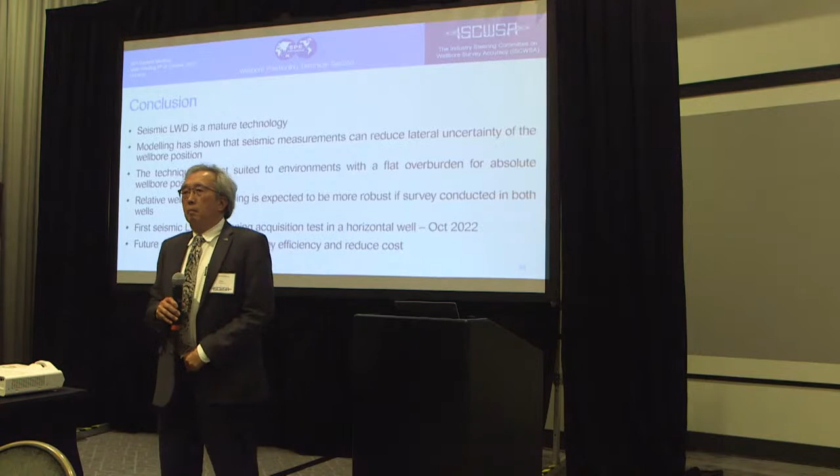On ranging, one of the things I learned 20 years ago with the introduction of the first gyro is that producing wells are noisy. You did not mention passive acoustic ranging as a means of locating and homing in on a relief well operation. Is that a potential thing to do?

Yes, in the ebook I mentioned that specifically — using the noise, listening to the drilling noise on the BHA from the project. Yes, I mentioned it in the ebook, but I didn't use this in the presentation. Right, okay.

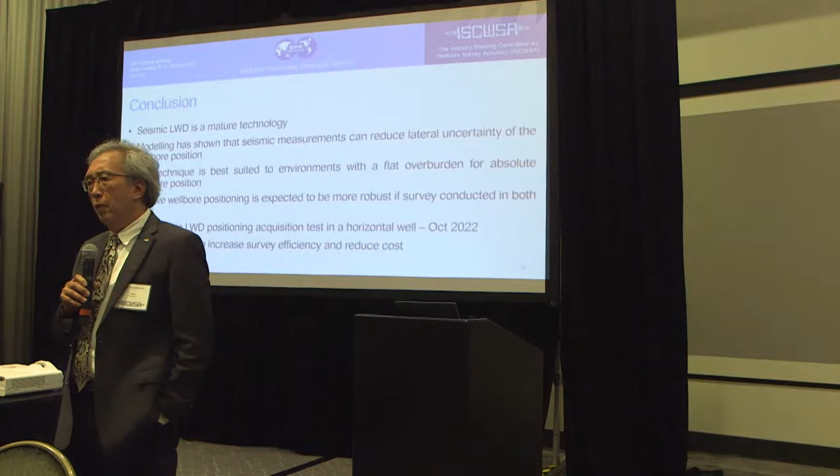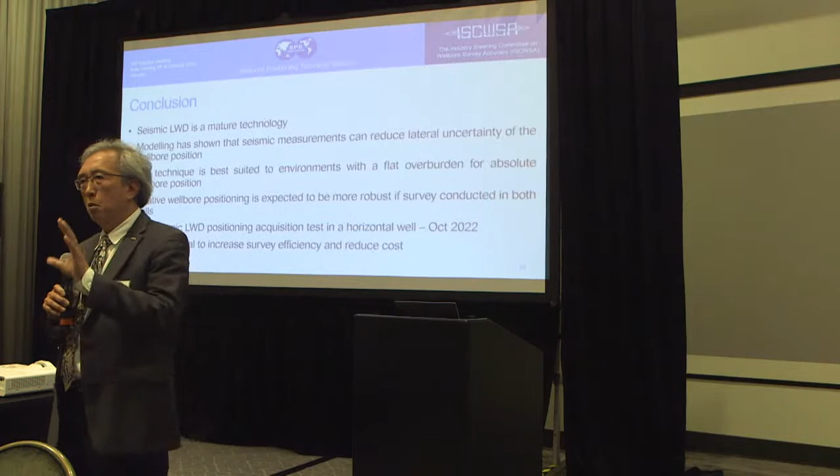Thank you. That's it? That's it. Come on, give me more. No, that's it.

The last presentation assumes that the overburden is flat in order to estimate the position. So what happens if the seabed isn't flat? Seismically, we don't always have a flat overburden. So does it still work?

Yeah, if you have dipping, that's going to introduce a skew in the data. But with modeling beforehand, assuming you have a velocity model, you can know what to expect. If it's dipping uniformly across where you want to drill, you'd do the survey at a point where you don't have much uncertainty in your wellbore position, and that will give you the real error that you have.

And if you're willing to make some assumptions, if it's fairly uniform, then when you've done 10 miles that way and you do it again, it should be a very similar error.

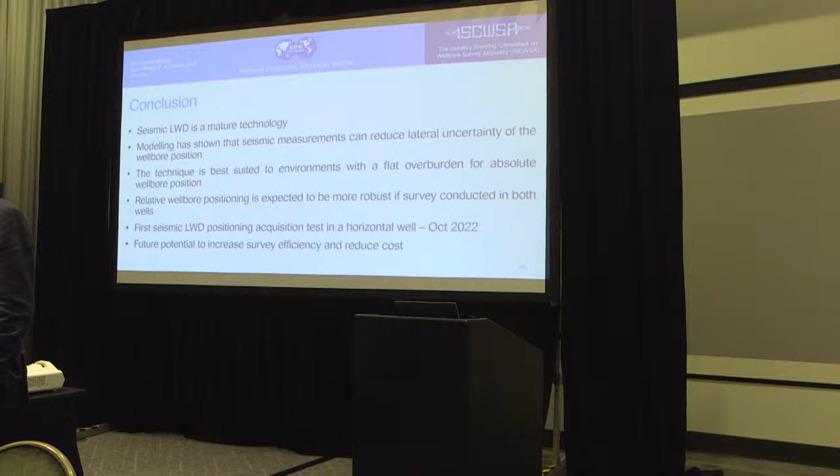Yeah, that's why it's important to calibrate, if you like, and check it where you've got low uncertainty in your wellbore position. That's the first place you want to do the survey, and that will give you the real error, not a modeled one.

Yes, assuming there's no massive change in the formation.

I got a question. You mentioned the word calibrate, and I was wondering, do you calibrate against gravity data, or do you fly in given gravity data to calibrate against? No, I'm not sure how.

Well, you could use gravity data to calibrate the elevation, right? And then you calibrate the seismic depth by overlaying gravity. So have you ever tested that out with some gravity data? No, that hasn't been done.

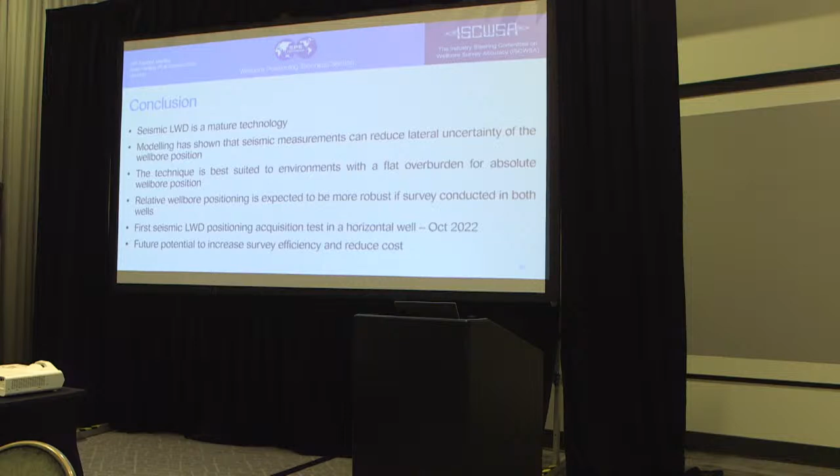All right, I don't know about you, but it's been a long week, so if there's nothing else to keep us going, we'll just call it to a close.